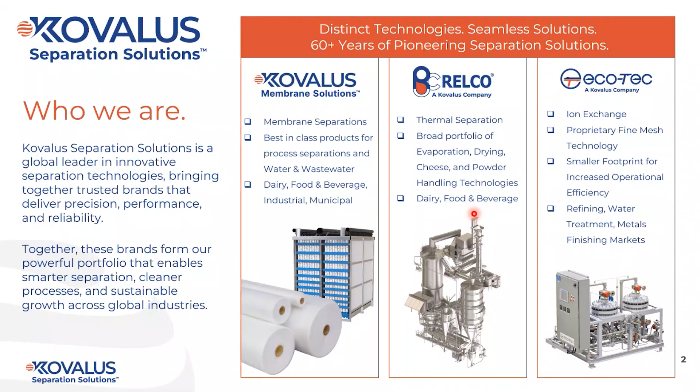All right, next slide. So today, before we get into the webinar, just wanted to provide a quick overview of Kovalus. Some of you may know us by our former name, Koch Separation Solutions, and we're coming up on our 2-year anniversary as Kovalus. With the rebrand, it's important to know that our mission has not changed. We've been a pioneer in the separation space since 1963, so we have over 6 decades of experience.

As you can see here on the slide, we have a portfolio of brands that make up who Kovalus is. We have Kovalus Membrane Solutions, that's kind of the focus for today, across 12 different markets. We also have Relco, which focuses on thermal separations, and Eco-Tec for ion exchange. So really, from piloting to full-scale implementation, after market sales and support, we do it all.

Next slide. Also, the thing about Kovalus is we're global. So we have key regions across North America, Europe, Asia, and beyond, and this allows us to work closely with our customers, providing local expertise and support.

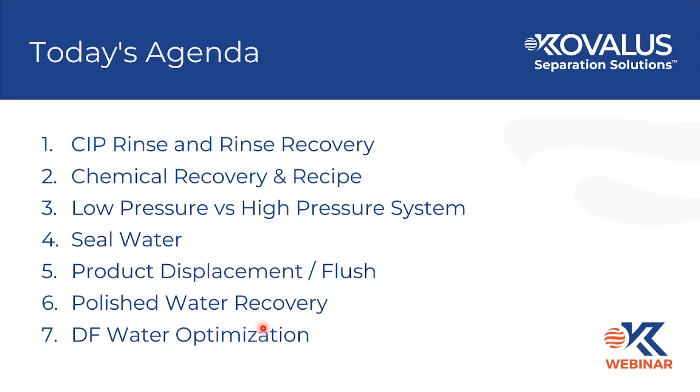Of course, when we talk about water recovery, there's no doubt you cannot avoid the topic of polisher RO—using RO for water recovery. As an industry, we've done well trying to do polisher systems, but let's try to see what else is there that we can keep pushing ourselves towards. DF water optimization we'll touch upon if we have time, but certainly we should be able to quickly look through it. So, covering those seven topics.

So we're starting with CIP rinse and rinse recovery. This first topic is a little long, so I'll dissect it into parts 1A, 1B, 1C. 1A is about rinse and using valves. This is an example of a one-stage machine, let's assume—you have a stage pump or recirculation pump going to a stage, and you're trying to rinse. When we talk about rinse, this is one stage with a stage pump.

But when I talk about rinse, I'm talking about the system being filled with chemicals, and we're using water to push the chemical out. Because we're working on a recirculation stage—a recirculation style of operation, and dairies are all recirculation style—this baseline is connected back to the recirculation pump. So when you rinse out, trying to push the chemical out, many times you get chemical sucked back into the stage pump or recirculation pumps.

So therefore, it's useful to have a CIP drain valve—we're calling it a CIP isolation valve—or the other option is using a plug flow valve, either of these options. What we've noticed is if you rinse in and out using valves, where it goes in and comes out outside rather than going back to the baseline, there's definitely about 30% optimization or water improvement. You can save 30% water, and you can reduce the time of the rinse itself.

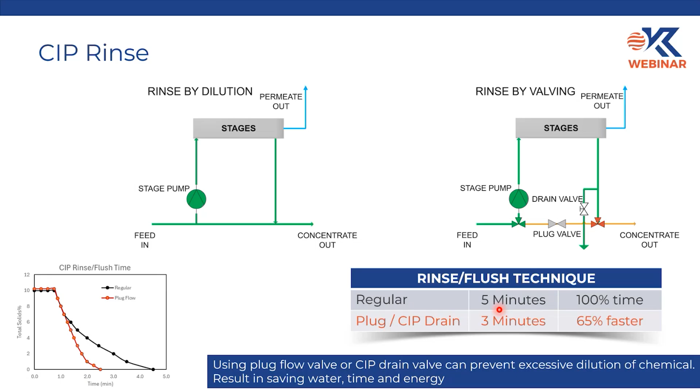Now let's slowly take that learning and blow it up into a bigger system, and see how it looks when expanded. I'll take half a minute to explain the different components of a big machine. Many of you are probably very familiar with filtration—this is something you know. For some of you, it may be newer or something you're still learning, so I'll just give you a brief introduction.

So you have a feed tank, a feed pump, and a baseline right here. Then you have stage pumps going to individual stages—this can be stages 1, 2, 3, or you can say stage 1 to 3, 4 to 5, 6 to 9, and so on. The permeate from these stages comes back to the permeate tank, and your permeate can be going out to permeate storage. Because membrane filtration needs so much CIP, you also have a CIP pump, which can be used for CIPing the lines. So that's a brief introduction of a stage, of the system itself.

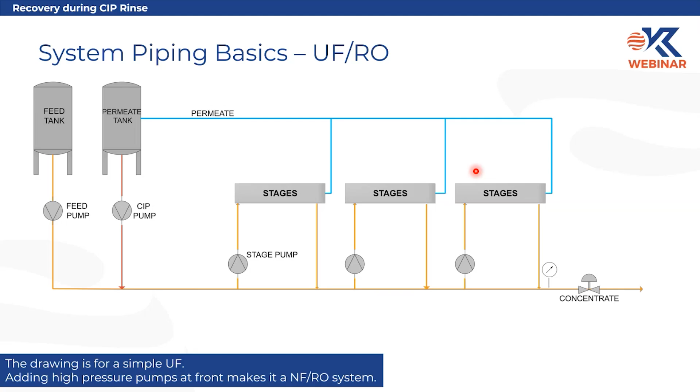So when we look at this, essentially when we're talking about trying to put these valves—we're talking about putting plug flow valves, like we discussed, plug flow valves.

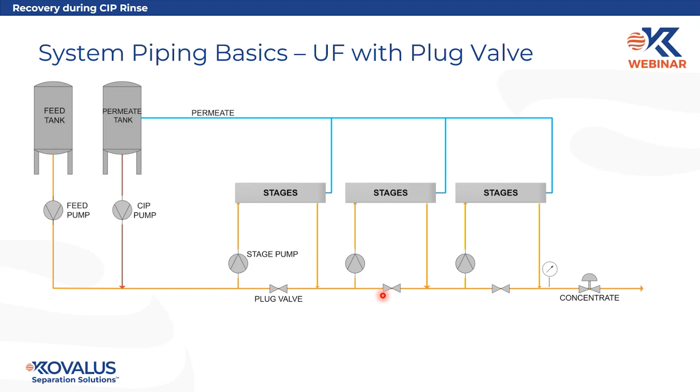How they look in a big system, and then also putting CIP isolation valve or CIP drain valves, right? So going out and you rinse faster.

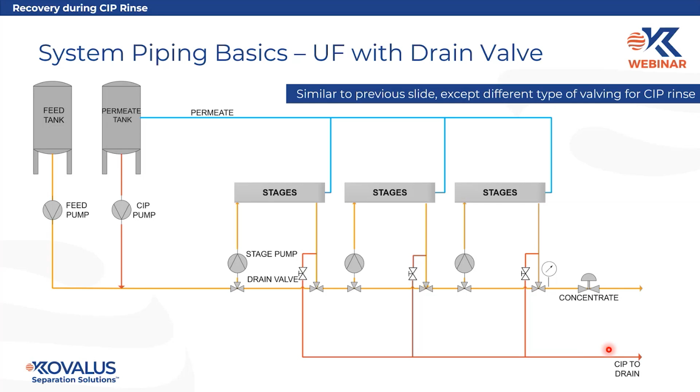Now that I've explained to you how the valves are, we will briefly talk about recovery during CIP rinse. This is part 1B, where we're trying to recover this rinse water using instrumentation. This instrumentation could be a turbidity meter, temperature, or conductivity meter - it's up to you, and it's something you can install in the existing system. That's a big advantage. There are some ideas we're talking about today, and what can we do in the existing system? Yes, let's say you put in some meters like conductivity, turbidity, and so on.

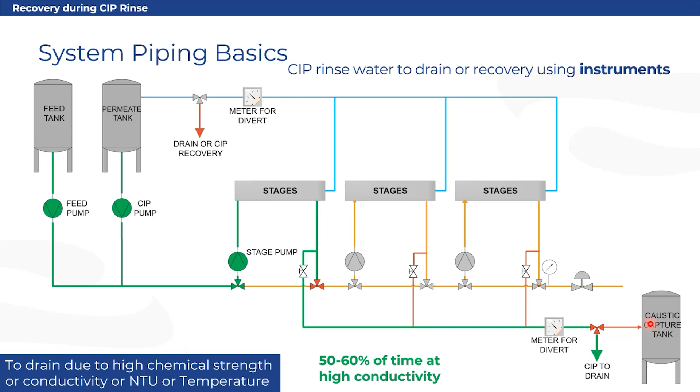You say, okay, I'm going to go to the drain because I want to remind you, this is rinsing the chemicals. So now you have caustic. Let's say caustic is rinsing out, and you're going to drain today. You're rinsing out the chemical, and what we're suggesting is, put a meter and try to recover that into a caustic recovery tank. I don't mean that you have to rinse every bit of caustic. It's about - our CIP partners will also understand - we know the first, say 50-60% of the chemical is very heavy in soil. We don't want to recover that because we know it's dirty soil. We want to go to the drain. Then when we feel that the conductivity, turbidity, or temperature is close to that of the inlet water, we want to go and capture that - we call it the caustic recovery or caustic capture tank.

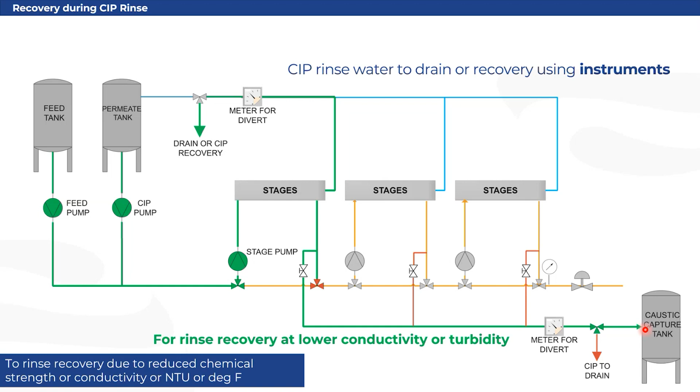So now we have to ask ourselves, okay, you're recovering the last 30%, but Saagar, there is heavy duty soil in the first CIP wash of a membrane system, right? So what we did is we are giving you a calculation. Let's look at a 9-stage UF machine, and say generally there are 4 or 5 wash cycles if you have a sanitize step and so on. But we have a CIP pre-rinse, let's say a caustic rinse, enzyme rinse, acid rinse. The main thing to understand here is that recovering the rinse water in the first 1 or 2 steps is probably not wise, because you want to clean the membranes. You want to keep your focus solely on cleaning the membranes.

But after you've done the first 2 washes, the last 2 washes, which could be an acid rinse and a final caustic rinse, you're saying it's 99 plus clean enough, which means the caustic and acid in the last washes are fairly clean. This means I can probably recover more than 50, 60, 70% of that and reuse it - put it into an acid capture tank, put it into a caustic capture tank, and then reuse that as the next day's caustic step or acid step. If you go about doing that, you'll find - and I'm being very conservative here, to be honest - there is also the possibility you can recover some of the final rinse in enzyme rinse, or at least in additional rinsing steps, or even line rinsing, which we'll come to. Overall, there is an opportunity to save about 15% of the water.

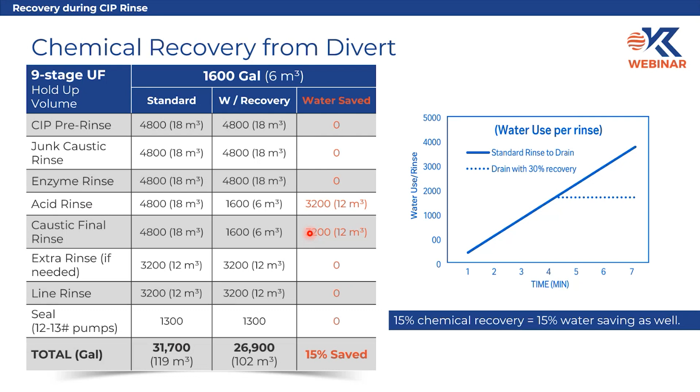And we're not talking about reusing this caustic capture or acid capture as chemicals - we know the chemical will be very low strength. So work with your CIP supplier; you might need to top up with more chemical, but the water is recovered. As a thumb rule, for every holdup volume of the machine that we've observed, you need about 2 to 3 times the amount of water to rinse out the machine. If you're at 3 - I took some easy numbers here - but with instrumentation application, you can definitely bring it down to about 2.5 times the holdup volume, and even more. I'm just giving you a gauge of what we've seen.

The next thing we're going to talk about, part 1C, is about rinsing the lines.

Now, here I want to take an example. How do we recover the rinse during line rinsing now, or stage rinsing? So I'm going to take an example of an RO machine here.

So it's all the same components like we discussed earlier. Over here, what we're talking about is, let's say, an RO machine, the same 9-stage RO machine. What happens is, RO machines don't have isolation valves like a UF and MF system. You generally have none extra, because it's a high pressure valve that's expensive and difficult to operate under high pressure. So we don't have valves.

So when you rinse out RO machines, what often happens is that you're rinsing out the chemicals going to permeate, and the concentrate going to drain, the permeate going to drain. But many times the first, say, first 3 stages already get rinsed out. Let's say your rinse time is 10 minutes. In the first 3-4 minutes, the first 3 stages are already rinsed out, and you still have to go through the entire rinse cycle to rinse out all the stages.

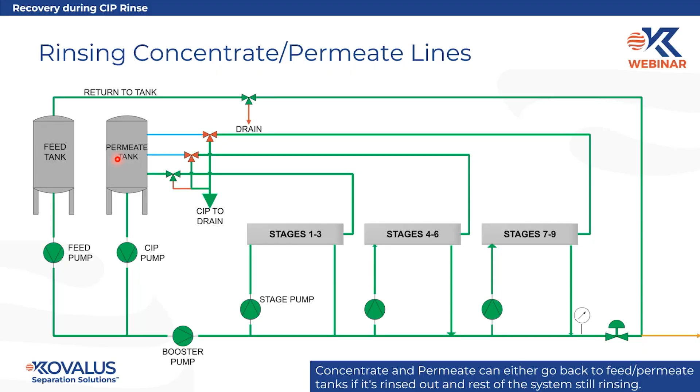The next thing we're talking about now - it was multiple topics within rinsing, but we've covered the rinsing and trying to capture the water out of rinse steps. Next, we're going to talk about the recovery of the chemical itself.

Now, this topic, I'm going to keep very brief. And the reason for that is we wanted this webinar to be more educational upfront. We wanted to share knowledge. And chemical recovery is something that Kovalus as a company has done for many decades now.

And SelRO is a technology that we have used where essentially what we're doing is we can recover high strength chemical, pH of 0 to 14, high strength caustic, 10 to 20% caustic, by removing the suspended solids using an NF membrane, which can take high temperature and high pHs, all range of pHs. The permeate that comes out of the NF membrane would be good strength chemical. We are able to do this in multiple markets, not only dairy. And for dairy specifically, we have many installs in dairy evaporator processing, where it becomes a good ROI.

But like I said, I don't want to spend too much time here. If you have interest in this, definitely reach out to your regional salesperson, and we'll be able to collect all the right information so we can do an ROI calculation and provide you information on it.

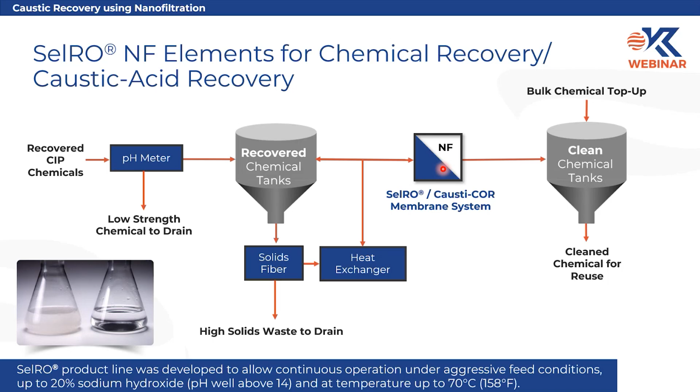Chemical procedure - I know we have some chemical partners attending, so we'd certainly like to talk about this. Mike and I, we visited many plants, and often what we've seen is a plant doing, let's take an example, a WPC 80 plant, doing 4 wash steps: caustic, enzyme, acid, caustic. And then we found that many times in a different plant, they're doing 3 wash steps, skipping the first caustic because they have a good displacement or flush step, let's say product displacement step.

And many other times we've seen plants doing weekly or twice a week acids, or once a week acids. So what we feel is, depending - and each plant is different - we've often seen these things, even for the same product, that are sort of like adjustments in the CIP recipe. So work with your chemical supplier.

Now, we certainly think there is a lot of opportunity here, especially in this example. We certainly feel that acids can be done, say, once or twice a week in a WPC 80 process, and you go well with the alkaline caustic washes and enzyme washes. But it can be specific to the plant - it may be an issue you had 2-3 years ago, and you're continuing to follow a full protocol. But trying to optimize the number of washes can give you 15 to 20% water savings.

And of course, it's saving you time. Now, the same example can also be said about the RO, where we've seen many times that permeate RO systems can have 3 washes. There are plants doing 4 washes. Some even do 2 washes, with every alternate day a 3rd wash.

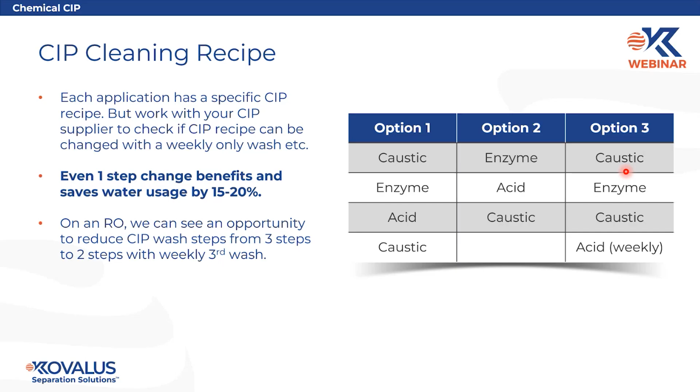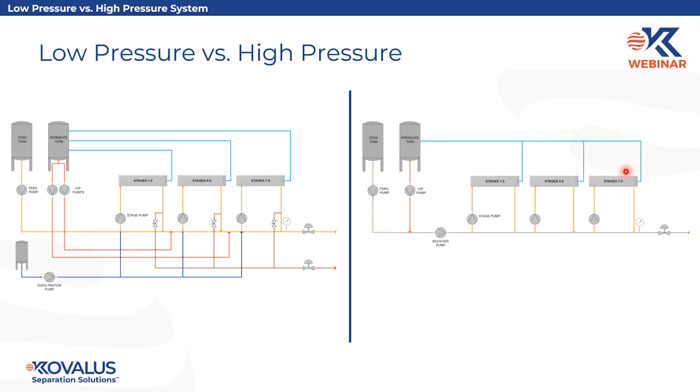Now we're going to talk about a third topic today: low pressure versus high pressure systems. This topic is more about giving perspective. Our intention was that we've seen a lot of plant engineers and project engineers working on water optimization, and it's important to understand how a low pressure system versus a high pressure system are functionally designed and engineered.

For example, when you go to a low pressure system like UF and MF, you'll see big pipes, multiple CIP pumps, much bigger tanks, and diafiltration — if you're making WPC, high WPC, or MPC protein products, you have diafiltration water. Essentially, the reasoning comes down to one major factor: all UF and MF systems have very high fluxes on CIP, high CIP fluxes. If you look closely at the velocity and flow rates of product, it's 650 gallons, 550 gallons, 450 gallons, or 150 cubic meters per hour, 100 cubic meters per hour.

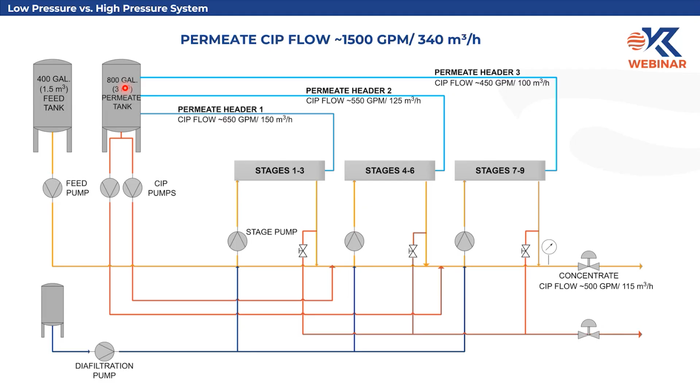So the turnaround of these tanks has to be very fast, which is why the tanks are big, with multiple lines, multiple valves, multiple pumps. Compare that to an RO machine with the same exact configuration — surface area wise, a 9-stage machine, same number of housings, same number of membranes. The entire line is going at 120 cubic meters per hour or 550 gallons a minute during CIP, which means the tanks can be smaller, and you don't need multiple pumps to make this flow go around.

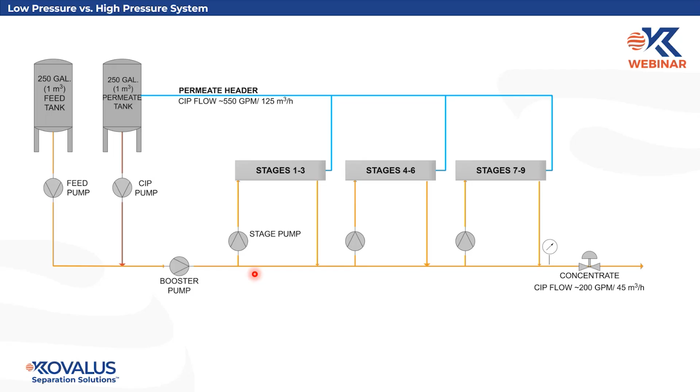That's the perspective we wanted to share: when you look at a UF and MF system, there are multiple ways you might save water. For an RO, for example, we gave an example of recovering the CIP rinse — that's a low-hanging fruit, some opportunity there. But the way you approach water savings in a membrane system differs between low pressure and high pressure systems. That's the perspective we wanted to share, and we believe it's important to understand this basic fundamental difference.

Coming to seal water reuse — this is something we found a lot of excitement about when we walked into plants. We see a lot of maintenance teams who have caught onto the opportunity to recover and reuse seal water. What we're proposing, one way we've done it in the past and executed — there are probably 2 or 3 ways to do it — is we put a seal water feed tank and a seal water recovery tank, and we essentially recycle.

So we add water using a water valve going into these pumps, and the return from these pumps goes to the seal water return, then back into the tank, and it keeps recycling until you put in instrumentation — this could be temperature or conductivity — and you can detect a leak or a rise in conductivity and send it to the drain. Then you fill the water back up using level sensors, and keep reusing the seal water.

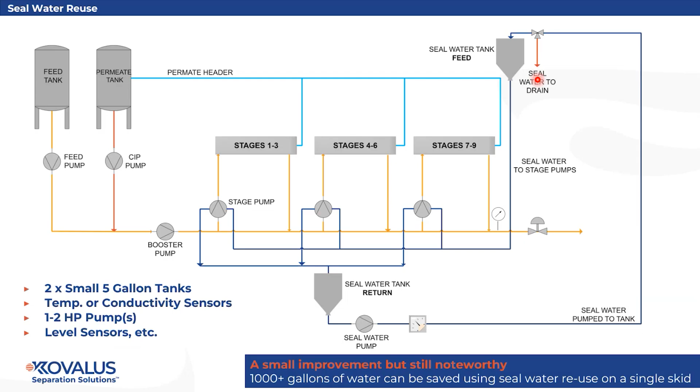Especially with bigger systems, bigger stages — let's say 8, 10, or 12 stage, which in some parts of the world you'll call loops — the number of pumps and seal water used can add up to 1,000, 2,000, 3,000 gallons of water a day if you keep going to drain. So trying to reuse the seal water is highly valuable.

Product displacement, or product flushing, depending on which terminology you're comfortable with, is another area. We wanted to give you a perspective on this and ways to think about it if you're looking to optimize in your plant.

So the example that we are using here is about low protein products like WPC 35 and high protein products like WPC 80 or WPI.

One of the fundamental differences between making these two products is the concentration factor. For example, here you have a much smaller concentration factor. Let's say you have 100 gallons coming in, you get about 20 gallons a minute going on the concentrate flow, essentially a 5 times reduction. Whereas for WPC 80 or WPI, it could be a 30 times concentration, which means for 100 gallons, you only get about 3 gallons of concentrate out.

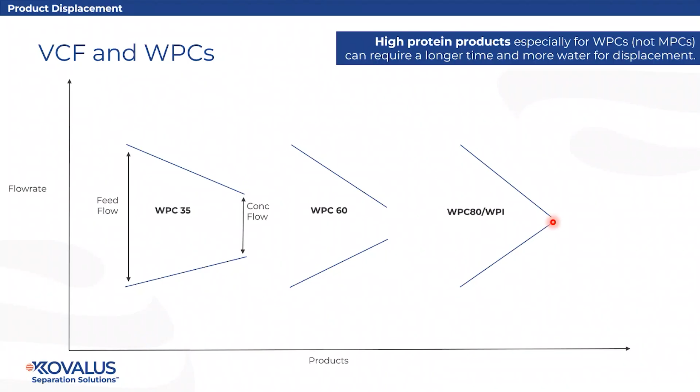So what happens is that the concentration factors are widely different. When you're displacing product out of the machine, you'll see that the amount of water you need to displace the 80 product is much higher, because you have to keep the valve concentration down and keep making product spec since it has to go to the dryer. So the amount of water volume and time you need by the time you finish pushing out the product can be much higher.

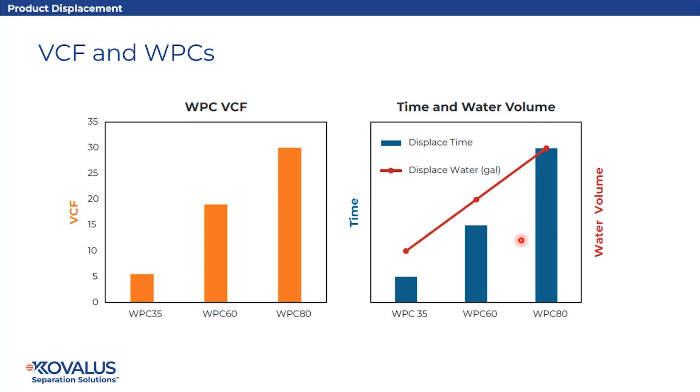So that's a perspective, to understand that it's very different if you have a WPC 35 plant versus a WPC 80 plant. At the same time, the question is what can you do about it?

One example we can talk about is the MPC process, like milk protein concentrate 70, 80, 85. A lot of times what people call is white water capture or white water rinse, which means they open the valve wide open and just push the MPC product out, but instead of going to the dryer and worrying about product spec, they bring it back to another capture silo and bleed that low spec MPC back into the next day's skim milk production 4 to 5 hours after CIP. So it's about opening the valve, pushing the product, forgetting about the spec, capturing it and reusing it.

So that is one way the MPC application has that we've seen. Again, our goal here was to give you perspective and try to see if this is an issue for you, and if so, find ways to optimize.

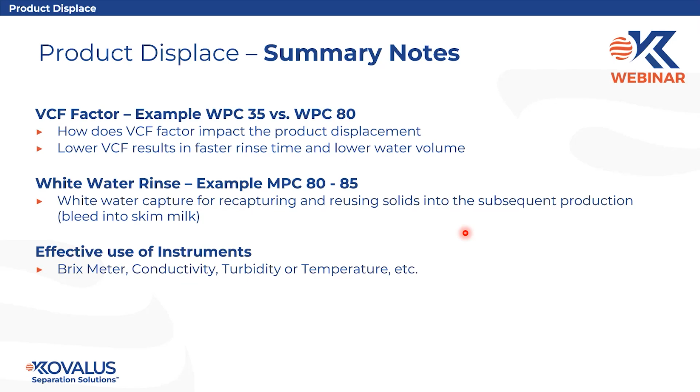Now, like I said, we have to talk about RO water because we are talking about water. Just checking on time, I think we're doing good. So RO water, like I said in the introduction, is something that as an industry I think we've done really well. Many of you are aware of RO polisher.

This is an example of a WPC or MPC, and then you have UF permeate, and you make RO concentrate at 18, 20, 24 solids, and the permeate from the RO is going to the RO polisher. You can add some evaporator condensate if you have lactose permeate streams. So the RO water we're talking about is what people are aware of as the RO polisher.

What we did is we said, okay, there is good understanding by the industry about using the RO for water recovery. What can we do to add in more?

So what we did is look at an RO making 18 solids, 21 solids, and 24 solids. And when I say RO, I'm talking about the RO before the RO polisher, not the polisher itself. So if you make 18, 21, 24 solids on this RO concentrate, automatically the higher solids you make, the more water you're going to generate out of the RO permeate.

So what we noticed is, let's say you go higher and higher in solids for the same feed rate, which if I recall was probably around 130 to 140 cubic meters per hour, close to 500 gallons a minute or so. But while you might need a 7-stage machine to make 18 solids, you'd need an 8-stage or 9-stage or 9-loop machine, and 11-stage or 11-loop machine for higher solids.

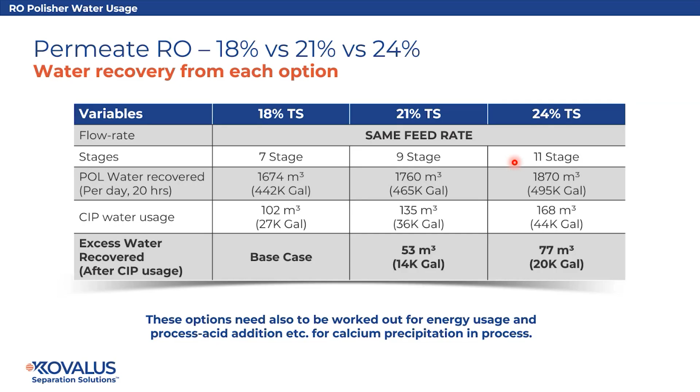If you go to higher solids, you have the potential to make 20,000 extra gallons of water a day, or 77 cubic meters a day, beyond the baseline. This is extra water beyond having additional stages and extra membranes. Of course, I'm not talking about the energy or the citric acid usage you might need if you're going to higher and higher solids. That goes along with it, but it depends on your need. We're presenting this on behalf of water recovery, so that's the angle we're showing, but energy and acid addition definitely need to be factored in. There's another point, which isn't on a slide, but I'd like to share it: RO polisher recovery.

As an industry, what we've noticed is that maybe 10 years back, everybody was doing 90% recovery of water, meaning 100 gallons go in, 90 gallons of water come out, and 10 gallons go elsewhere. That's 90% recovery, or a 10x concentration factor, same thing. In the last 4 or 5 years, more and more plants are pushing for higher recovery. We often see between 92, 93, and 95% water recovery being pushed, maybe a 20x concentration factor, same as 95% recovery. That's where the industry is today.

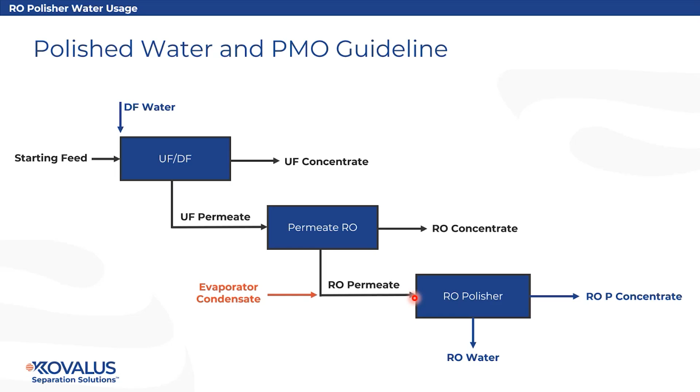There are certain challenges that come up when you go to higher recovery. Our thought process is that it really depends on the mineral content or water quality feeding the RO polisher. In some plants, you can comfortably make 20x concentration or 95% recovery, whereas other plants need more rigorous CIP to overcome that. So that's subjective, where we are today. But there's certainly been a push in the industry over the last 5 years to increase recovery from 90% to 95%, and maybe some are doing even more than that, which is excellent. We just wanted to point out that trend toward higher recovery, which comes with its own compromises. But it seems like there are feasible solutions and workarounds that we're going to see across the industry.

The last topic is DF water optimization. For those newer to filtration, dairy filtration, or protein filtration, DF water is water that's added, say, to a UF machine in order to make higher protein products. It's essentially water that's being added—you can add polished water, of course after UV or chlorine dioxide treatment or other treatments depending on regulatory standards where you're from, and add it into the UF machine to make high protein products.

What we're suggesting is that it's important to understand where the DF water is added. For example, in a 9-stage machine, whether you add water from stage 1 to stage 9, or stage 6 onwards, or stage 4 onwards, the amount of water used in each option defines your overall water usage. This is probably a fairly well-understood concept now—you have to add water more toward the back end of the machine, like stages 6, 7, 8, 9, which gives you the best water efficiency and DF water optimization. But take a look at your own plant; if there's opportunity, try to move that water addition to the back end.

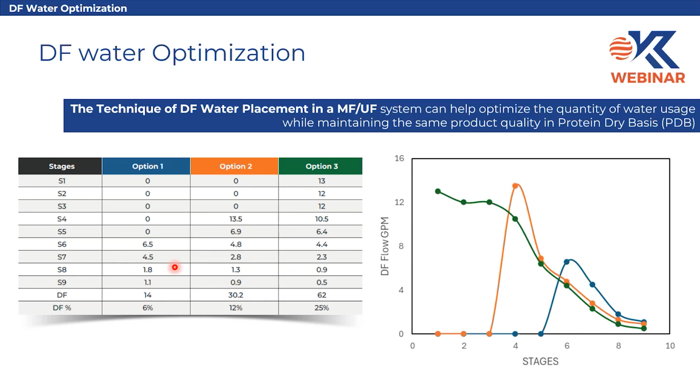The second thing, which goes without saying, is where you inject the water. Over time, people have learned that adding it to the suction side of the stage pumps is very effective, but that's something to pay attention to. There are a couple of things to consider: where and how you strategically add water, and how mechanically you're adding it.

We talked about using instrumentation and trying to go either to the drain, and after some time, when we feel the conductivity is low enough but not completely low to the water, we can say we capture that as a caustic recovery or acid recovery. Let's say it's rinsed out 60-70% well, and now you capture it and reuse it.

For next day's caustic or acid strategically, you can't just use it in the first wash. You have to strategically choose when to use that recovery caustic and recovery acid after doing some extra chemical addition.

Then we talked about also using instrumentation wisely. You can use existing flow meters possibly, or add instrumentation, because they're fairly economical. But what we talked about is an RO machine, let's say a 9-stage machine, and you don't have multiple valves like a UF and MF, which you can isolate a stage and rinse only a stage 2 or 3 and not 4.

In RO, often you're rinsing all the stages at one time. And even if you slow down the pumps in the front end, 3-4 minutes for a 10-minute rinse, you might finish rinsing, but it's still rinsing. So use the flow meter or instrumentation wisely and blend that permeate from the first few stages back to the permeate tank, which again comes back as fresh water for the later stages to rinsing, instead of going to the drain.